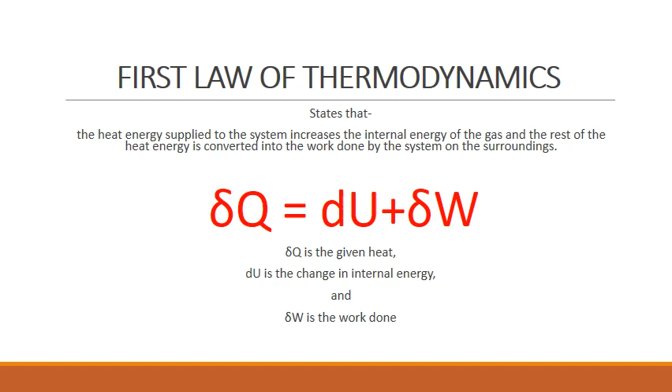Thermodynamic processes. The first one is the quasi-static process: a very slow process where the system is always maintained in thermal equilibrium. The second one is the reversible process: a process that can be made to reverse its direction of flow by changing the physical conditions, and it is considered that there is no dissipation of energy. Third, cyclic process: any process where a system returns to its initial state; the change in the internal energy of the system, dU, is equal to 0.

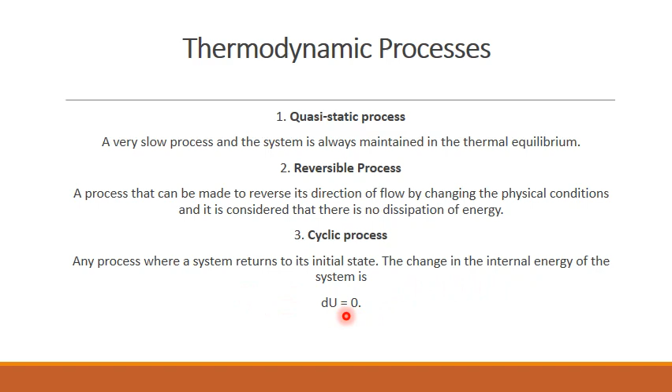Fourth, isochoric process: a process in which the volume is constant throughout. The work done in isochoric processes is W equals P dV, where the change in volume is 0, so P into 0 is 0. So work done is 0 in an isochoric process. Isobaric process: a process in which the pressure is constant throughout. The equation of state becomes V1 upon T1 equals V2 upon T2. The formula of work done is P dV, so we can write P into V2 minus V1.

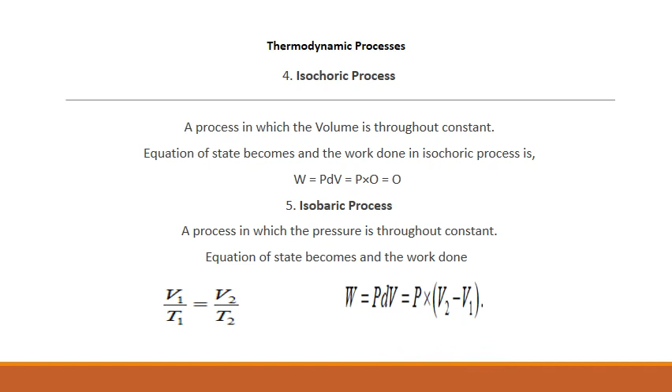Isothermal process: a process in which the temperature is constant throughout. The equation of state becomes P1V1 equals P2V2, and W is equal to nRT natural log V2 by V1, or nRT natural log P1 by P2. We can convert natural log into log with base 10; we have to multiply by 2.303.

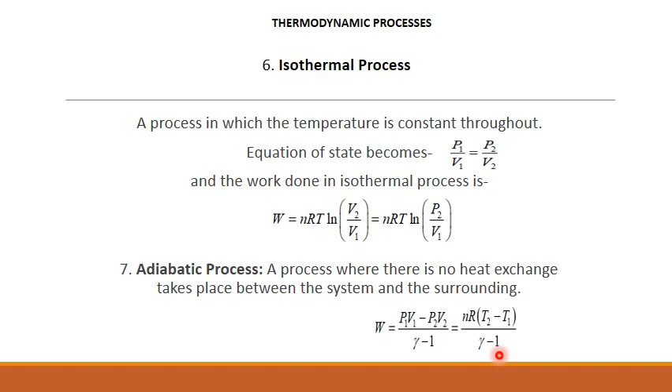Next one is the adiabatic process: a process where no heat exchange takes place between the system and the surroundings. W will be equal to P1V1 minus P2V2 upon gamma minus 1, or nR T1 minus T2 upon gamma minus 1, where gamma is the adiabatic coefficient.

Specific heat at constant pressure, denoted by Cp, is the amount of heat energy required to raise the temperature of 1 mole of a gas by 1 degree Celsius at constant pressure. Cp is delta Qp upon n delta T. Next is specific heat at constant volume, denoted by Cv. It is the amount of heat energy required to raise the temperature of 1 mole of a gas by 1 degree Celsius at constant volume. Cv is equal to delta Qv upon n delta T. We can also write delta Qv as delta U, the change in internal energy, upon n delta T.

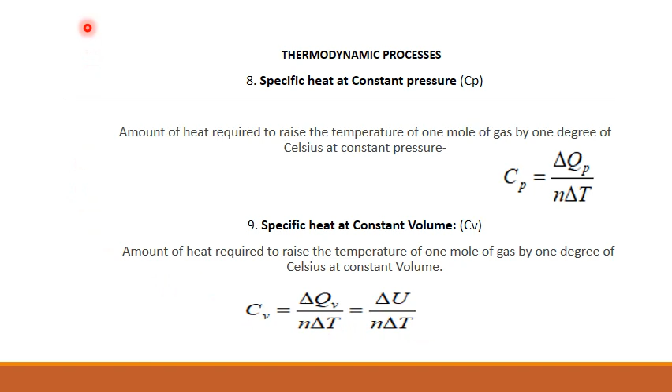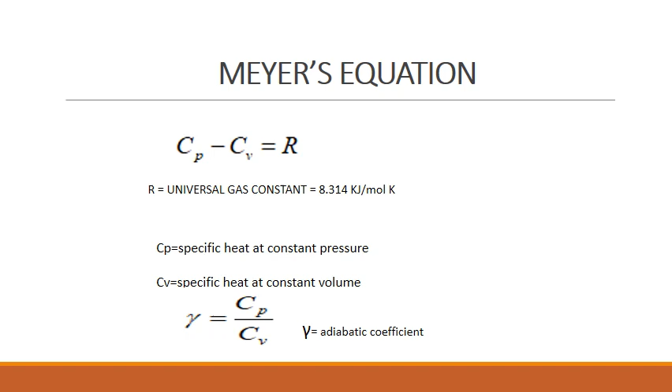Mayer's equation. In this equation, Cp minus Cv is equal to R, where R is the universal gas constant and its value is 8.314 joule per mole Kelvin. Cp here is specific heat at constant pressure, and Cv is specific heat at constant volume. Gamma, as we discussed in the adiabatic process, is the adiabatic coefficient and it is equal to the ratio Cp upon Cv.

PV diagrams of some thermodynamic processes. First one is the isochoric process. As we can see in this PV diagram, we draw a line parallel to the y-axis. In this, volume is constant. Next is isobaric. In the isobaric process, the line is parallel to the x-axis and pressure is constant throughout. Next is the isothermal process, where we draw a curve which is a rectangular hyperbola. In the adiabatic process, we also draw a hyperbola-like curve, but the slope of the adiabatic curve is greater than that of the isothermal curve.

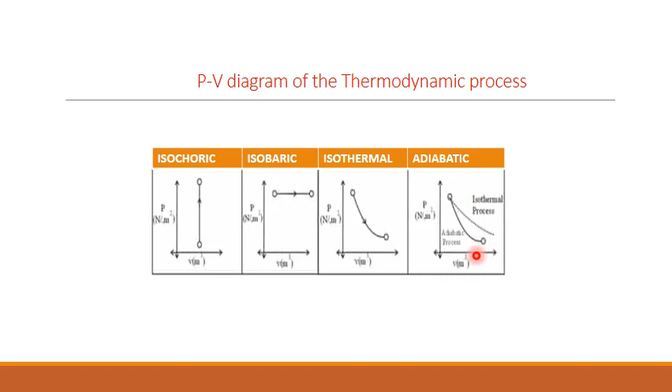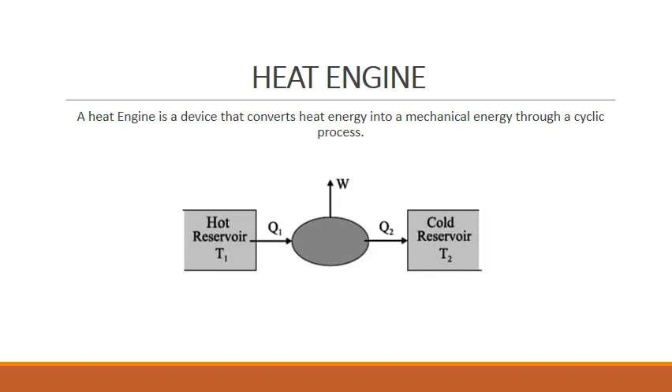Heat engine. A heat engine is a device that converts heat energy into mechanical energy through a cyclic process. There is the hot reservoir, which we can call the source, having temperature T1. We draw the heat Q1 from here. Some amount of heat is converted into work done and some is given out to the sink, that is the cold reservoir at temperature T2. Efficiency of heat engine: eta is given as 1 minus T2 by T1, where T1 is the temperature of the source and T2 is the temperature of the sink. Keep in mind that both temperatures are in Kelvin.

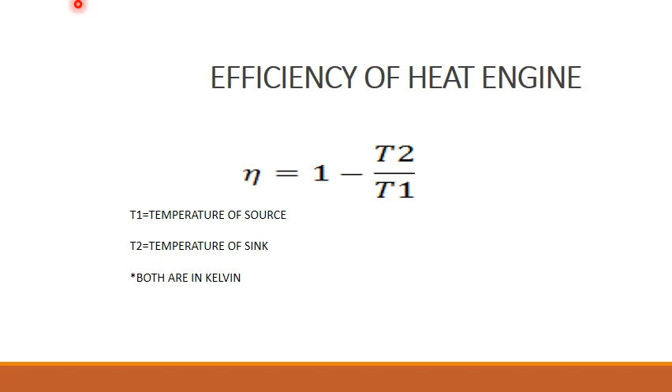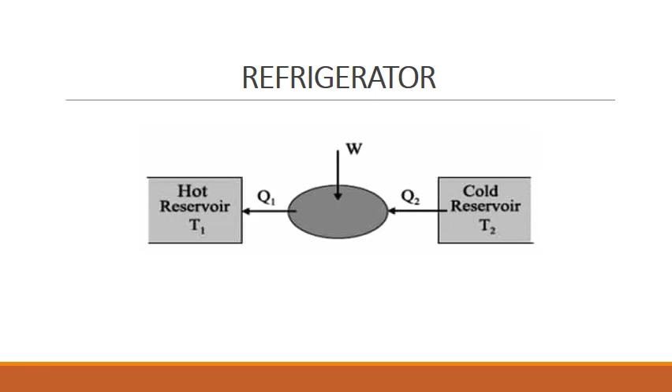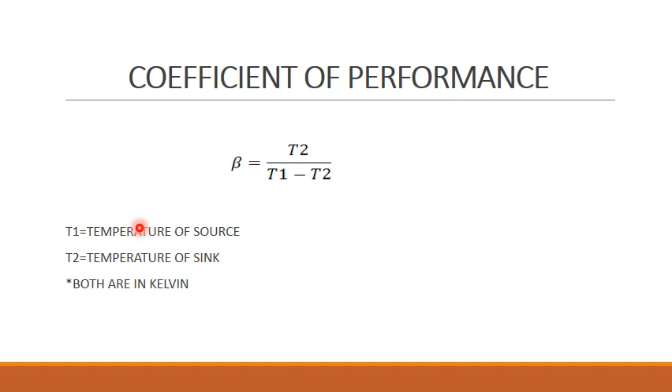Refrigerator. The hot reservoir, that is the source, has temperature T1, and the cold reservoir, that is the sink, has temperature T2. We are taking out heat Q2 from T2 in the refrigerator. So we have to do some external work, and the heat Q1 is supplied to the source. Coefficient of performance of refrigerator: it is denoted by beta, and beta is equal to T2 upon T1 minus T2, where T1 is the temperature of the source and T2 is the temperature of the sink, both in Kelvin.